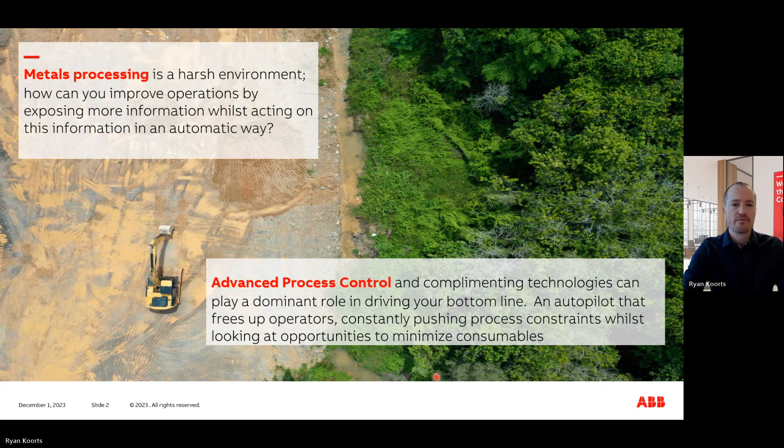So at ABB, we contribute to industry's quest for increasing efficiency through our leading technologies. We facilitate a low carbon society. And just to give you a flavor of some interesting recent examples where ABB is helping future-proof plants digitally to help them reach their current goals. So at Heidelberg Materials, the Mokra plant in the Czech Republic has chosen ABB for automation and digitalization through ABB's 800xA DCS system and Expert Optimizer.

ABB and the mining company LKAB are looking to become the world's first large-scale fossil-free method of steel production. So here the project is set to define fossil-free energy to reduce CO2 emissions by replacing coal with hydrogen in the steel-making process. And at Semen Indonesia, energy efficiency and digitalization is core to PT Semen Indonesia's sustainability strategy. To improve energy efficiency, the company has adopted ABB Ability Expert Optimizer, the advanced process control solution for controlling, stabilizing, and optimizing operations of the mills and kilns at its integrated plant.

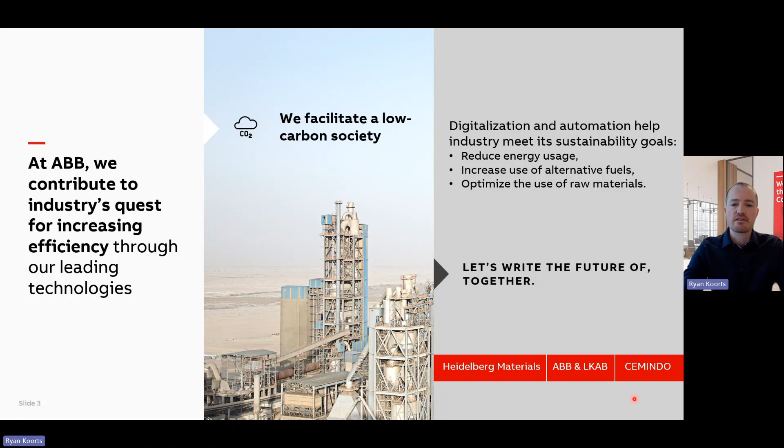So what exactly is advanced process control? I'm sure most people on the call have a fair idea, just so we're all on the same page. Advanced process control is normally referred to as the level 2 application that resides on level 2 and facilitates closed loop optimization of the plant with minimal operator supervision. So think of layer 0 as the devices in the field, the instrumentation and equipment, such as the pumps, conveyors, valves, drives, etc. And then level 1 being the plant's control system, PLC, DCS.

And then advanced process control resides on level 2, where advanced process control is an umbrella term for a number of technologies such as model predictive control, fuzzy logic, where the task of the APC is to automatically understand the current state of the process, how far away the state is from targets, such as what's my current temperature, pressures, etc., and then facilitating closed loop control to drive the plant closer to these targets much more frequently than an operator.

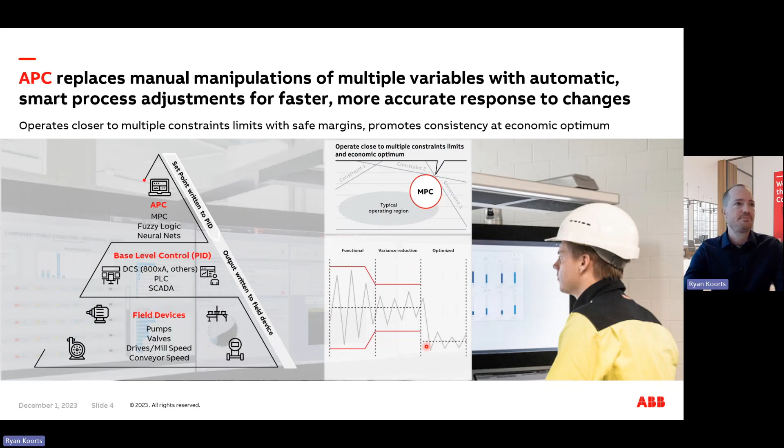So with Expert Optimizer being a product facilitating advanced process control, I like to see Expert Optimizer as the toolbox where you have the right tool for the right application. So some of the tools available would be the Model Predictive Control Engine, where Model Predictive Control uses dynamic models of your process, which are obtained empirically from your process data. So it's unique to your process, and it uses the dynamic models of your process with the current states.

So the current states of temperatures, pressures, feeds, densities, etc., with the recent historical states to predict the future states based on the model, and then how far these future states are away from targets or constraints, and then what control actions are required to drive the process closer to these targets, and how long that's going to take, and how aggressively or passively is up to you when defining the controller. Up to you and the ABB engineer.

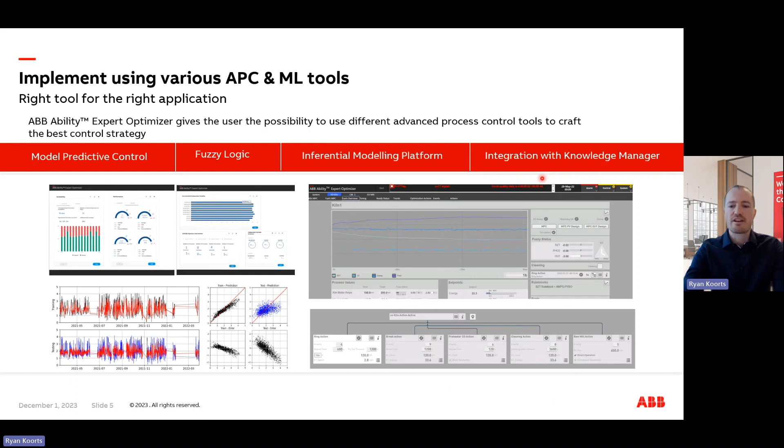Just an example of the inferential modeling platform for the creation of soft sensors. Here we have an NOx estimation where the predicted state is in orange and the actual measurement is in green. So this is just to illustrate that if the actual measurement were to go down due to a faulty reading, you would also have the predicted as a backup to continue control of the plant. So that's another use for the inferential modeling platform, also for sensor validation.

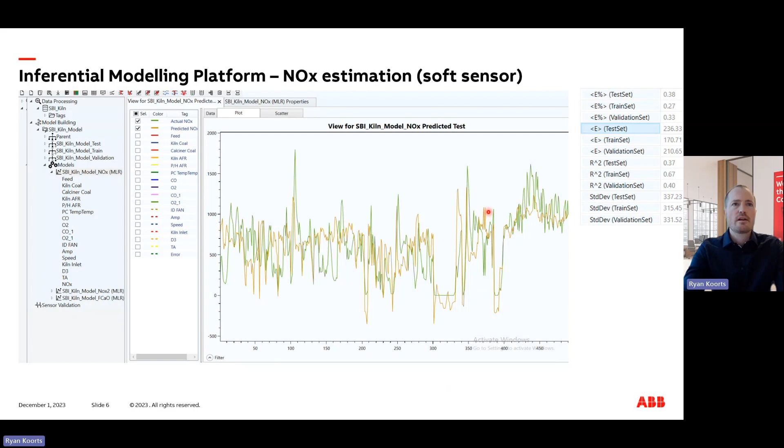So we are now joined, like I said at the start of the webinar, by Prem Prabhakaran, who is the Digital Transformation Manager at Foulath Infotech, which involves the Bahrain Steel operation in Bahrain. Bahrain Steel is a mine-to-metal iron ore pelletizer located in the heart of the Arabian Gulf. Its twin plants have a combined rated capacity of around 12 million tons of pellets for either direct reduction or blast furnace steel making. So Prem will share his experiences in working on digital transformation projects and how to realize value from digital and the current industry priorities.

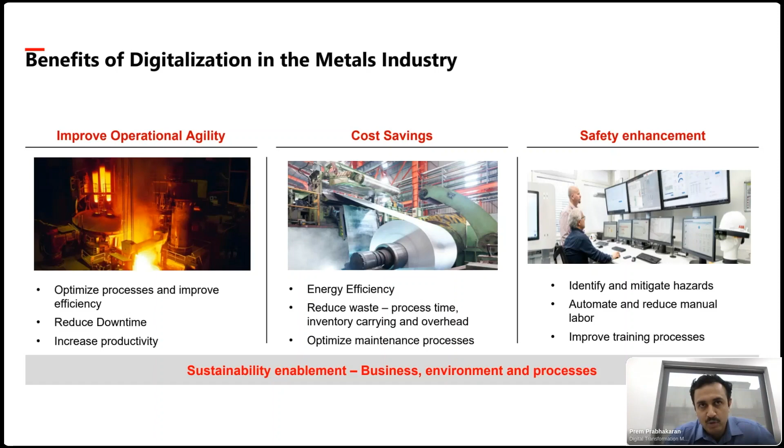And let's discuss how to realize the value. When we talk about digital, it is more of an organized way of executing the projects, not disparate implementations here and there from the business units. So to achieve these benefits, we need to have a clear strategy, roadmap, and then investing in the people. Without these, it is very difficult to realize value, because people will start many POCs, and some implementations here and there. With each technology, we'll try it out, but it may not be sustainable.

So the first thing is top management alignment. Every company has a 1 year goal, 3 year goal, 5 year goal. So what is the business priority we need to understand, and then create a digital strategy around that. It's not that you set up a data lake, purchase IoTs. No, it doesn't work that way. So if the company has to achieve this in 1 year, 2 years, 3 years, then to enable that, what is the digital tool which we can implement?

So it's always a business enabler; it's no more a support function. It is kind of an upper hand on the business itself. So what is the business strategy and business goal, and to achieve that, what are the tools which we can implement? That should be the part of a digital strategy. And once this strategy is set up, there should be a roadmap.

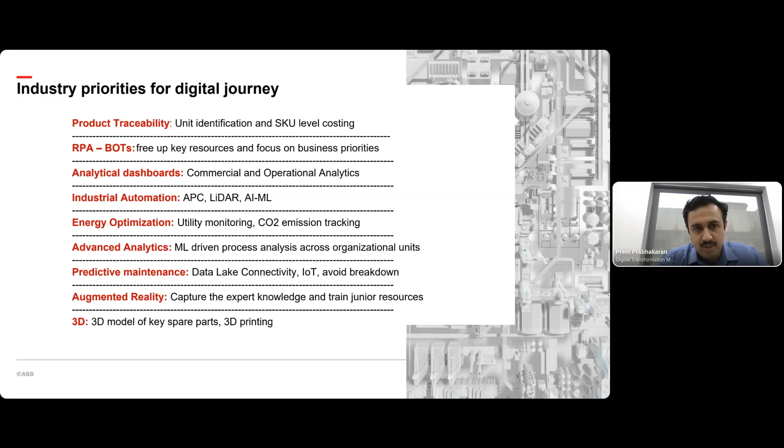So this roadmap is based on the business strategy, the payback period of the use cases, and the enablement which can give benefit to business. So once this roadmap is made, then we can start implementing one by one. I'll discuss the process. These are some of the typical use cases which are implemented in the industry. So it can be in any order.

So based on your business, the main thing is product traceability. We say customer intimacy and customer satisfaction, and it is not possible to give real good customer intimacy or customer interactions if there is no unit identification of each and every product. So it is quite challenging, but whichever system you are using, it could be level one, level two systems, or ERP systems like SAP, Oracle, or maybe there is QR code, as I think Tarun has mentioned, mechanisms around OCR, which can connect with engraved batch numbers or QRs. So there are systems or tools available at present which can actually perform unit identification.

So you can actually switch from a make to stock scenario to a make to order scenario, and then for each product category, you should have visibility and traceability from end to end, so it could be on QC, logistics, sales, and at the end it should be related to costing. Then we will come to know what is the actual product cost for this type of product, and what is the margin you are getting. So you can also benefit, and interact with customers in a better way. So this unit identification is very much possible with the right involvement of digital.

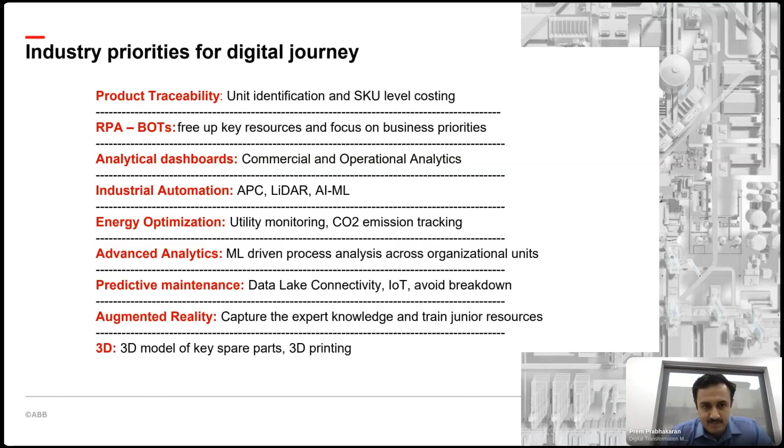Thank you, Prem. Your thoughts and experiences there are much appreciated.

So to continue with Bahrain Steel, in 2019, Bahrain Steel and its sister companies from the Foulath Group engaged in an all-out commitment to a state-of-the-art digitalization transformation program. This focused on expanding on top of the existing base level of control and optimization. So already in place was ABB's control system, which is 800XA. I've highlighted a range of features here, but I'm not going to go through them.

As well as the existing knowledge manager, which is continuing to evolve, and the ongoing work in maintaining the system, expanding its functionality, interfacing with the SAP system, centralizing the knowledge manager data in terms of compiling data from both plants into one system, which is obviously very, very powerful. And what the Expert Optimizer also takes into account and exploits is the integration with the LIMS system. So being able to manage, interact, and read information from the lab.

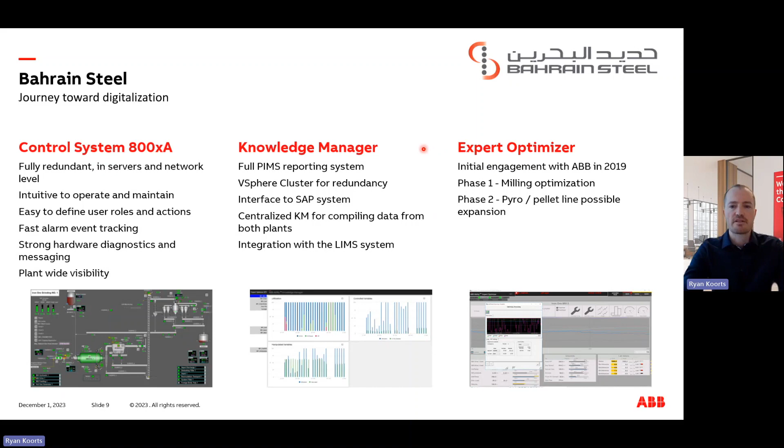So the Expert Optimizer applied to the grinding mills, acting as an autopilot for ongoing optimization. So here it's currently applied to plant 2, where there are 3 grinding mills, with a capacity of around 1,000 tons per hour. So here what's interesting is the Expert Optimizer is constantly looking and observing the states of the mill drive loads, the outlet temperature, the pressures in the mills, the inlet temperatures, the elevator load, and the returns.

And then based on these current observations of states, understanding how far these are from targets and limits, making control actions to constantly push this particular process closer to these desired targets from operations. Looking to take control of the separator speeds, the gas valves, and the air dampers in the process.

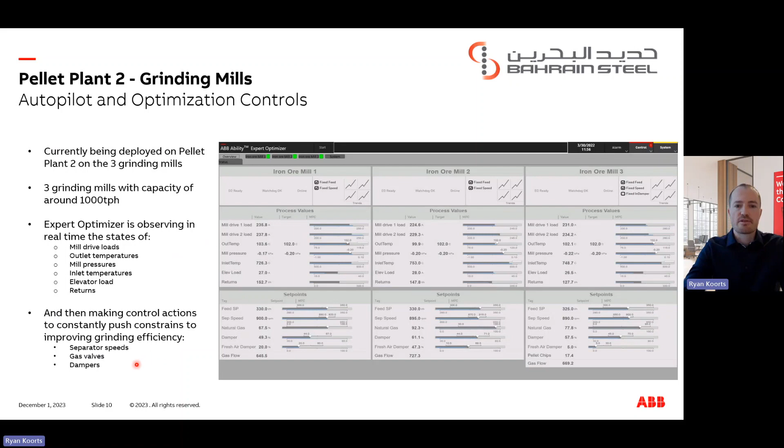And so by doing this, the ongoing target of the Expert Optimizer application is to improve load stabilization, improve the stabilization of the outlet temperatures of the mills, improving the dust bag filter efficiency, and by overall stabilizing the circuit, reducing specific energy consumption of both electricity and gas.

One other, you could say, non-tangible in terms of metrics benefit would be the significant reduction in operator workload on this particular unit of 3 mills. So this was observed by plant personnel, which allows those operators to focus on different parts of the process. So now that these 3 mills are in autopilot mode for the majority of the time, they have more capacity to take control actions over different units of the plant that don't currently have Expert Optimizer.